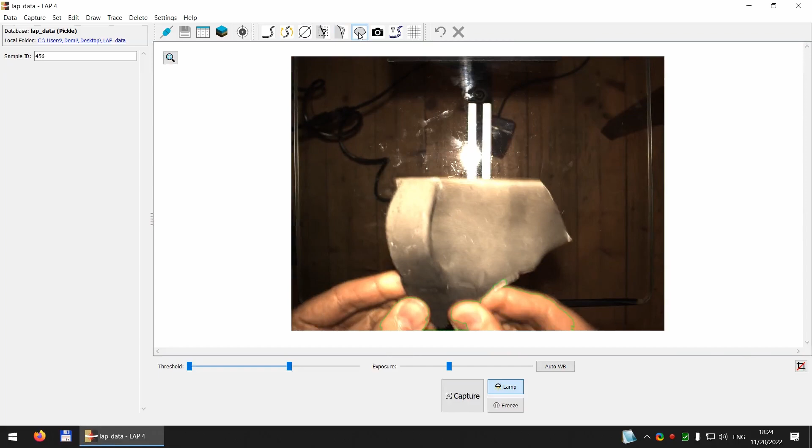In case we have a fragment where additionally to the main profile we need to capture additional details, such as a handle, for example, something like this. It's a rim fragment with a handle. We can use the capture detail and capture handle functions, which we'll demonstrate in this video.

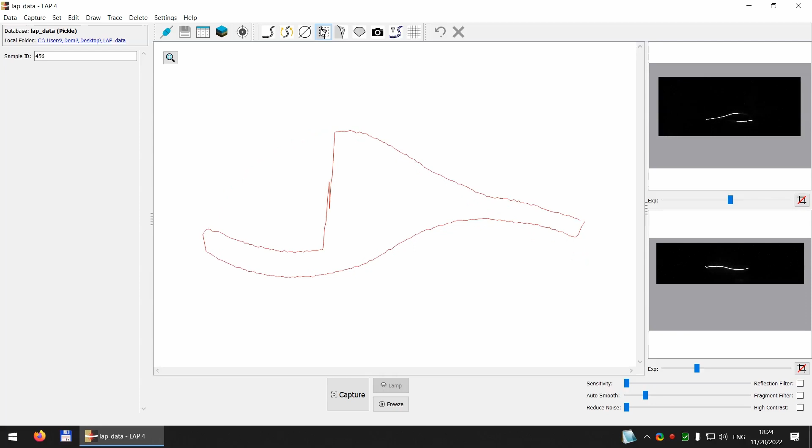So first, let's switch to capture detail mode. And here we can first capture the profile at the handle, so where the handle is attached. Capture. Now I can rotate it. Define the rotation center here.

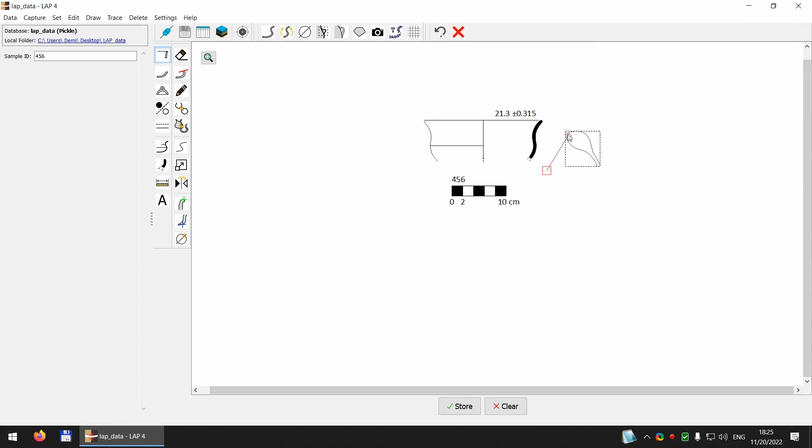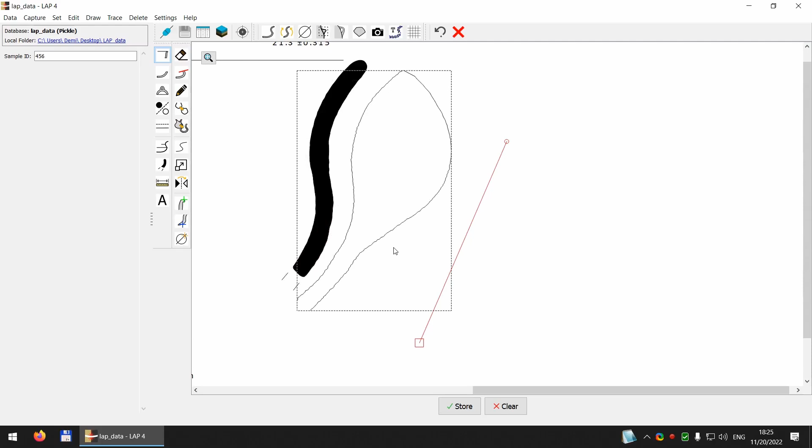I can also use the Alt key. Just press it and then I can freely move this rotation handle. Then when I release the Alt key, I can continue rotating. So I have captured the outer profile of the handle, but not the inside, because the laser line cannot project inside the handle.

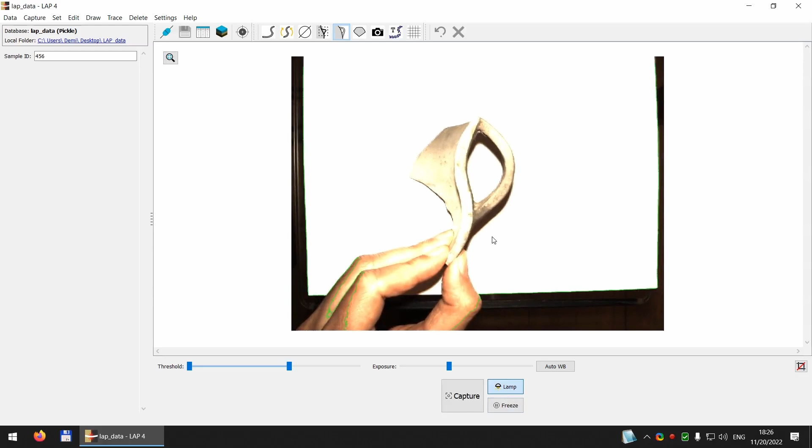So what I need to do now is switch to the capture handle mode here. Use the white paper background and hold the fragment so that I can see the handle from the side. And you can see when the lamp is on, we see a lot of shadows here. So in this case, we don't need a quality photograph, we just need the outline. So I can turn off the lamp and just increase the exposure to get a better outline.

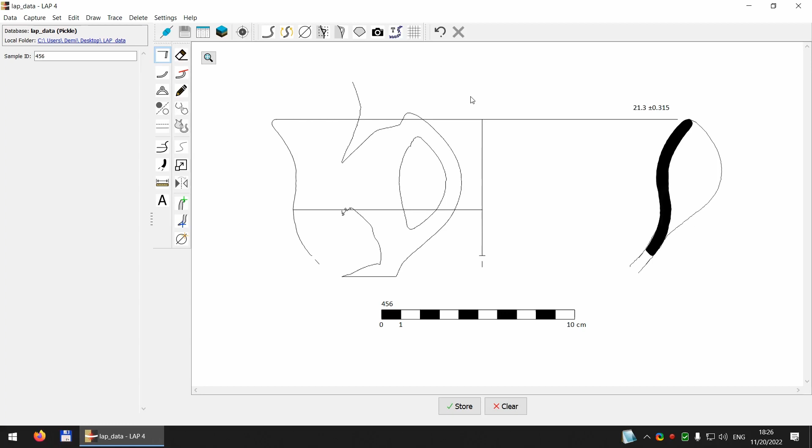I can also use the crop envelope again here. Just get that part that I need, I can click capture. Now I have captured both the outside and the inside of the handle, but also other parts of the profile which I don't need, so I can just move it somewhere here. And now use the trim profile function to erase this part of the profile that's unnecessary.

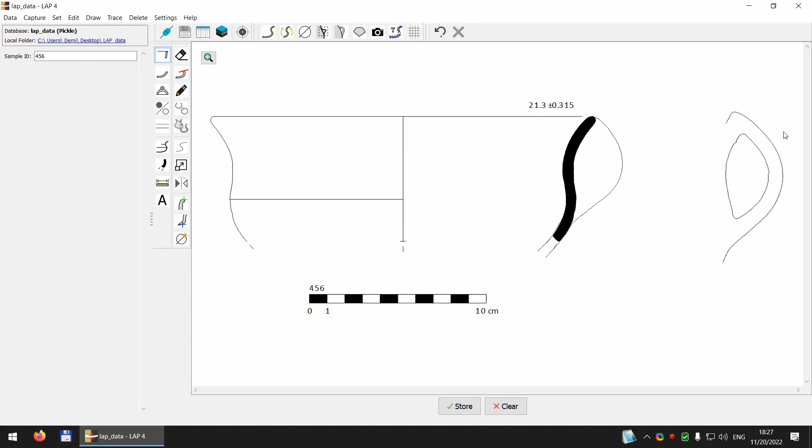Okay, so now I'm just left with the handle, and as you can see, it's slightly larger than I need, because I was holding it a bit closer to the camera, to the lens, since there was the rest of the fragment, so I couldn't just hold it at the glass pane. So I can use the scale function either by clicking on the scale button, or by holding the control key while adjusting.

Again, I can move the rotation center, hold the control key, and now this handle becomes a scale handle. Now if I release the control key, I can change the rotation, and like this adjust the captured handle to fit the profile I scanned using the laser scanning, which is very precise.

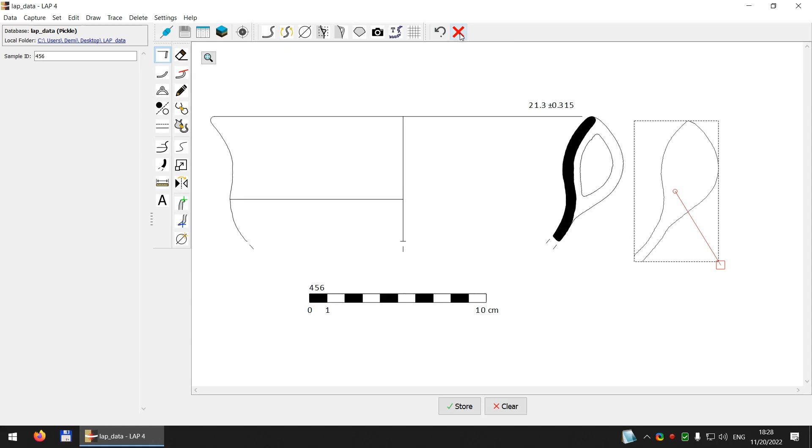So now that I'm satisfied with it, I can remove the originally captured detail. It's a bit tricky because now I have several details over each other, so I just have to find out which one is the one I want to delete. This is the correct one, so I can just delete it either using this button or just pressing the delete key on the keyboard. So now I have captured the handle.

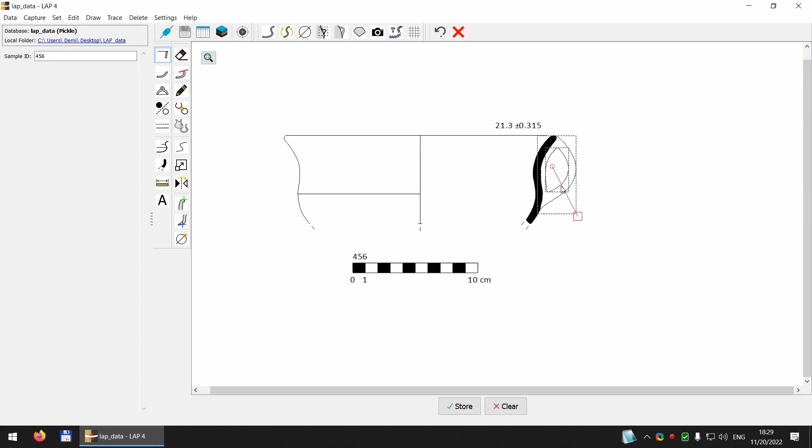If I also want to display the handle on the other side of the drawing, I can simply select it like this, so both the outside and the inside of the handle. Go to Edit, Duplicate, here it will ask me whether I want to duplicate this as a detail or a profile. So I leave in detail, click OK. It will create a duplicate.

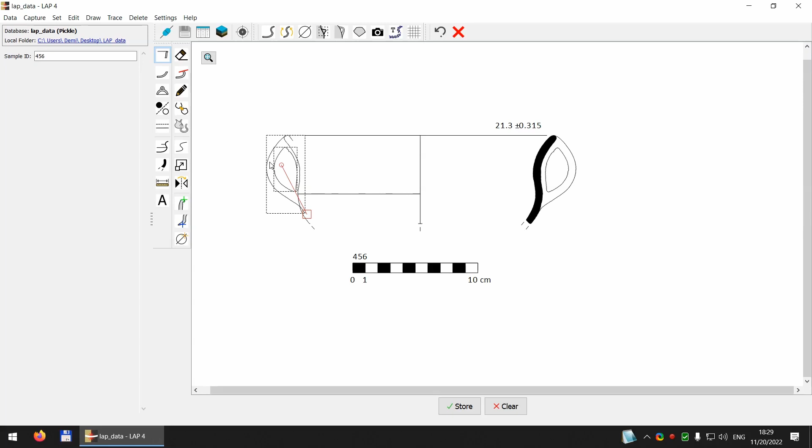Again, I select the duplicate. I use the flip horizontally function to mirror it and move it to the other side of the profile. I can also further trim this part here. I can also use the smooth function. Here it is a bit jaggy, so I can just use the smooth function to smooth it out. Same here.

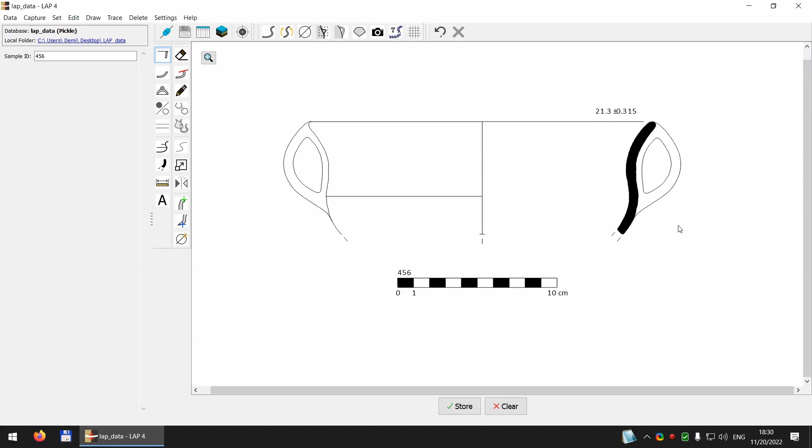Okay, so this is how we can capture handles and add additional details. So similarly, if there was some protome or some other protrusion, plastic detail on the profile, I could capture it like this.

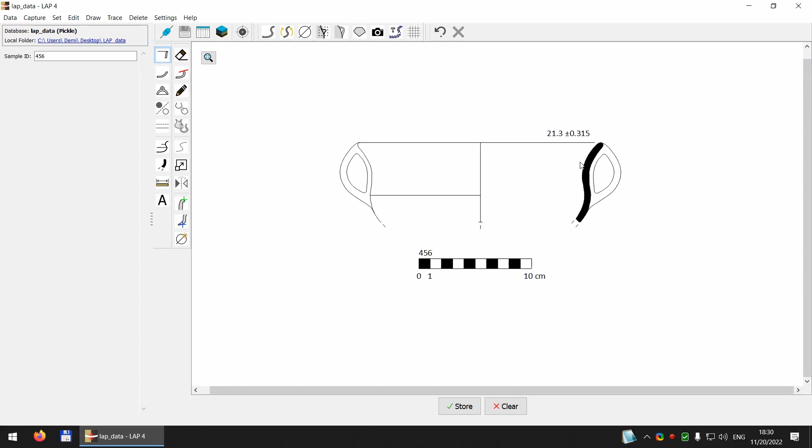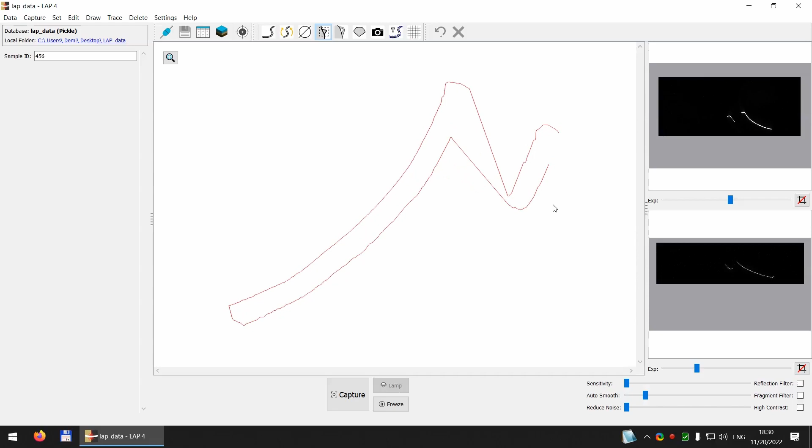So now let's say I want to also capture the cross section of the handle. Again, I switch into the capture detail mode. I take the fragment and I scan the cross section. So I just hold the handle under the laser and I scan its cross section. Capture. Again, I can move this out of the picture here.

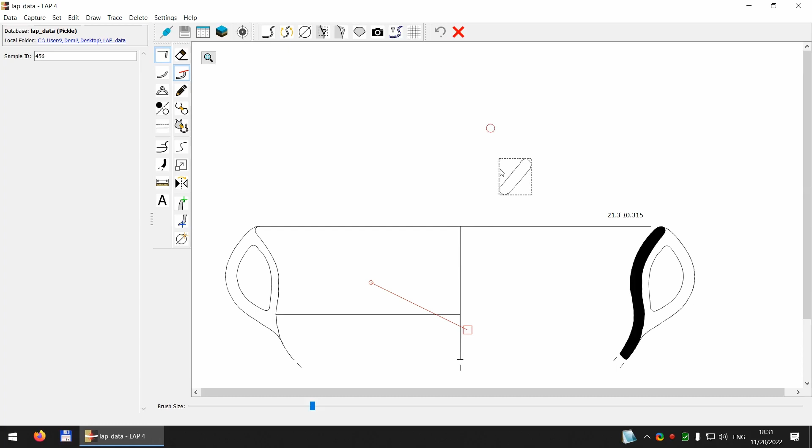Use the trim tool to erase the unnecessary part. This. Rotate it. Here. If I zoom in, you can see that the outline is not complete, so the polygon is not closed. If I select it, I can use the close profile function to close it. I can smooth it out a little, not too much, and if I want to, I can also indicate that it should be filled.

So this way I can capture a drawing also with additional details and I can store it in the database.